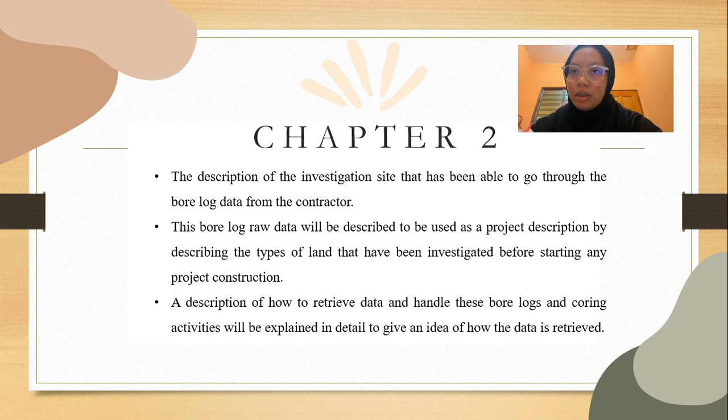For the introduction, in this chapter, we will emphasize the description of the investigation site that we have been able to go through from the borelog data from the contractor. This borelog raw data will be used as a project description by describing the types of land that have been investigated before starting any project construction. In addition, a description of how to retrieve data and handle this borelog and coring activity will be explained in detail to give an idea of how the data is retrieved.

Next, we go into the site investigation. The site investigation activity started with a desk study, which is among the most valuable and cost-effective aspects of the site investigation. At this stage, the site is not visually assessed. Instead, a search is conducted for any information regarding the site, such as the environment, constraints, land resources, and so on. Next is the site visit, where they will discover more about the site project.

After the 2 activities are carried out, it is possible to determine the aim of the investigation, which is to discover potential geotechnical issues that will occur on the site. The site investigation also aims to process the collection of information, appraisal of data, assessment and reporting of the geotechnical issues found in the site area. The main goal of the site investigation is to determine the sequence of different strata and the position of the groundwater and its fluctuation limit.

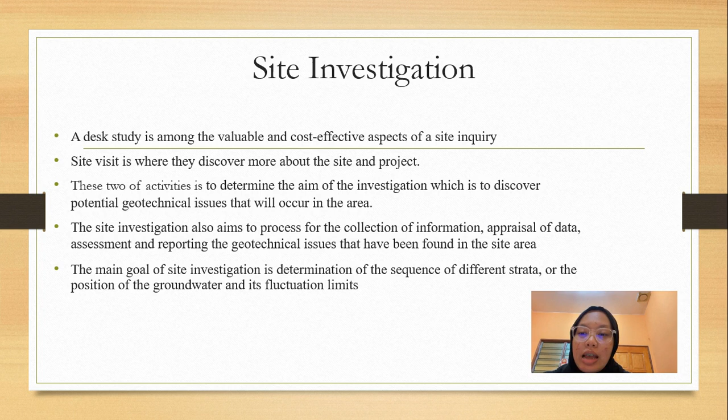The main purposes of soil exploration are to select among alternative sites, to decide on the depth of the foundation, to select an appropriate method of construction, to select and locate construction materials, to evaluate the safety of existing structures, and lastly, to decide on the remedial measures for damaged structures.

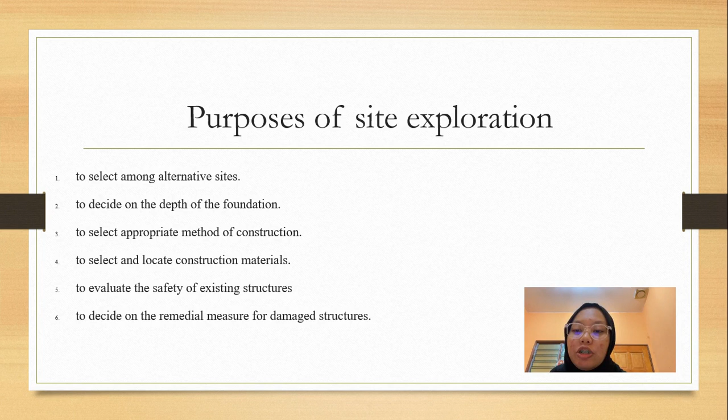These are a few field tests that we use: sounding test, static sounding penetration test, dynamic sounding test, Dutch cone penetration test, cone penetration test, and standard penetration test. In our project, we use the standard penetration test, SPT, which is an in situ penetrometer test.

These conventional penetration tests are performed in a borehole. The test will determine the resistance of the soil strata to penetration. To conduct the standard penetration test, the tools are a standard split spoon sampler, a drop hammer weighing 63.5 kilograms, guiding rods, drilling rigs, and driving heads.

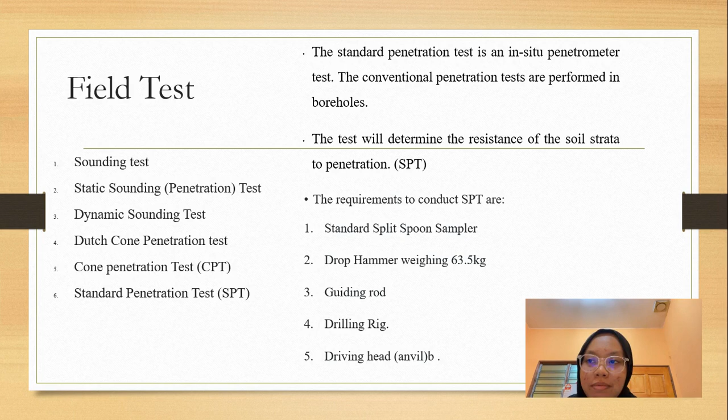Today I'm going to talk about the borelog data. There are two types of borelog data that you can get. The first one is the borelog data from the contractor, where we get the borelog data in situ sheet, shown in figure A, while figure B shows the borelog report with the data that you can get from the consultant. Both of these data will give you the significant values needed to design a foundation.

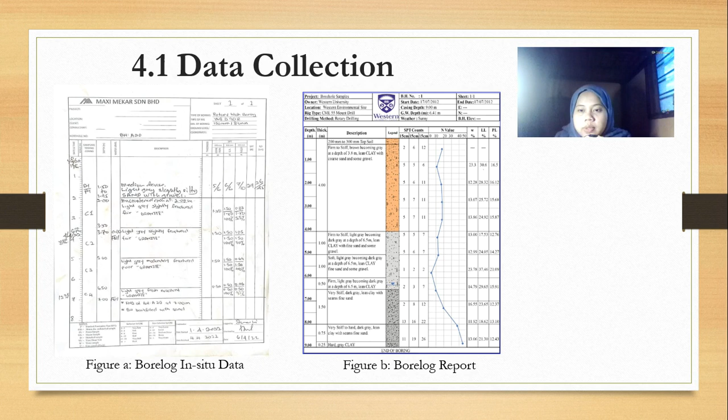It's required for us to do site investigation before we can design a foundation. One of the field tests that we can do is SPT, standard penetration test. When we do SPT, we get the SPT value. The N value should be corrected. The method is shown in the chart, showing how to correct the N value.

Before you can correct the N value, you need to classify which type of soil you have. For our case, the type of soil is sandy clay. We assume that it's a cohesionless type, hence we need to calculate the overburden pressure correction. We actually refer to a manual guide where all the formulas are given, and we just calculate what is needed.

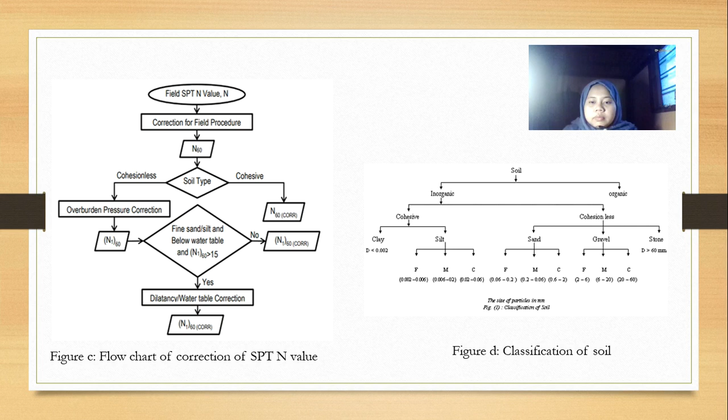The table shows all the parameters that you can use to design a foundation. All these parameters are calculated by the formulas given in the manual, or based on our pre-assumptions based on our studies.

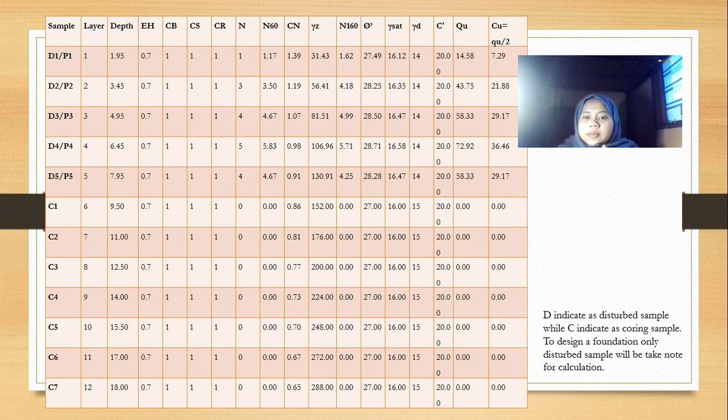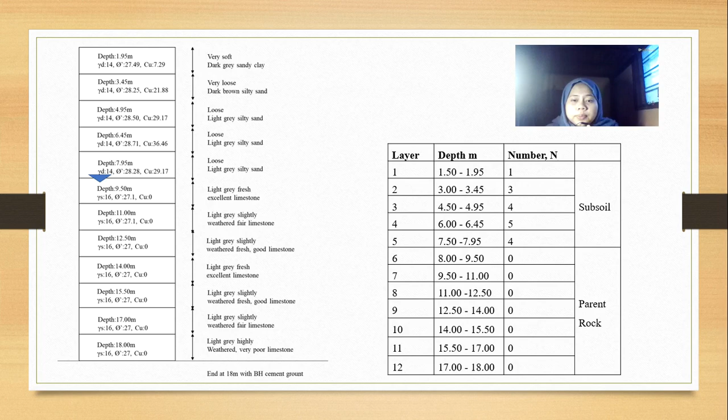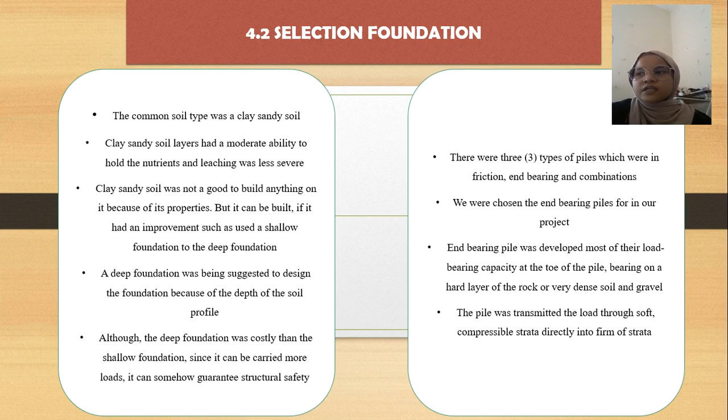Selection of foundation. The common soil type was a clay sandy soil. The clay sandy soil layer had a moderate ability to hold nutrients and leaching was less severe. Clay sandy soil was not good to build anything on because of its properties, but it can be built on if it had an improvement, such as changing from a shallow foundation to a deep foundation.

A deep foundation was suggested because of the depth of the soil profile. Although the deep foundation was costlier than the shallow foundation, since it can carry more loads, it can somehow guarantee structural safety. There were three types of piles: friction, end bearing, and combination of friction and end bearing. We chose end bearing piles for our project.

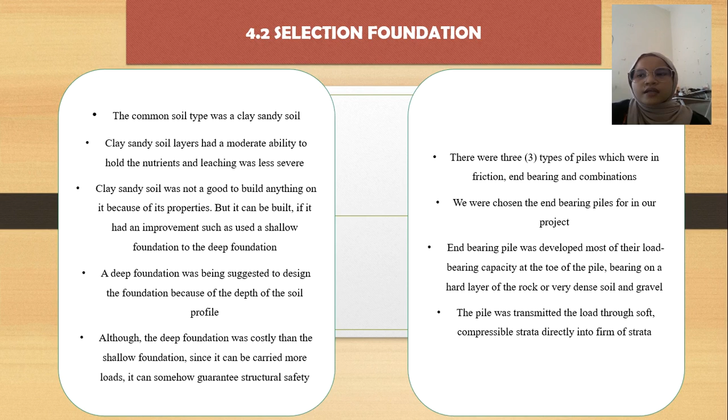End bearing piles develop most of their load bearing capacity at the toe of the piles, bearing on a hard layer of rock or very dense soils and gravels. The pile transmits the load through the soft, compressible strata directly into firm strata.

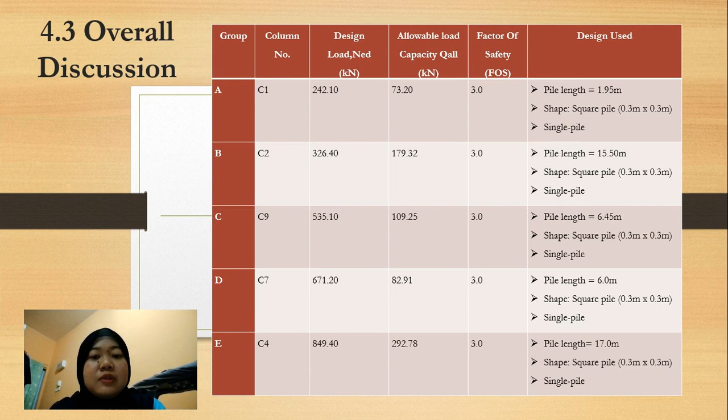Okay, the table, as we can see, shows that there are five groups of ranges of the column loads. From each range we will choose one to perform the calculation. For this table, all the calculations are using a single pile. Okay, next table. This is our calculation for the group pile. We chose C4 because it has the largest load from the column.

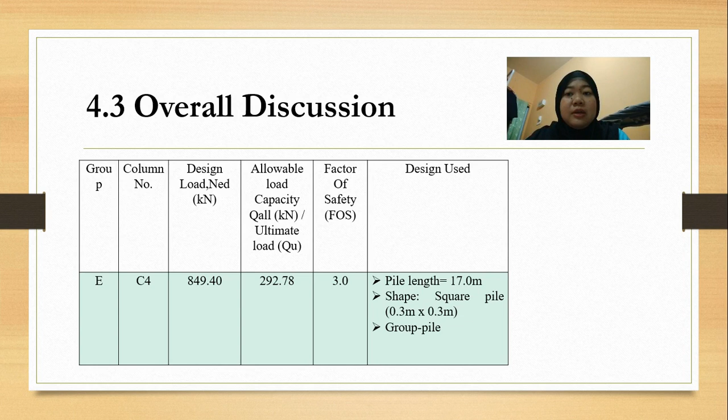For the discussion, we concluded that C1, C2, C7, C4, and also C9 show that the value of the allowable load capacity, Q all, is smaller than the value of the design column load, NED. That means the use of a single pile is not suitable for the foundation design, as the column had a bigger value than the foundation itself. So single pile design for this foundation is not strong enough to accommodate the load of the column and structure on it.

For the elastic settlement checking for all the design calculations, we concluded that the maximum value is below 65 millimeters. That means the settlement in the land area is safe and suitable for the structure construction. Thus the load from the column and the foundation can be borne by the soil structure.

From all the foundation designs, we came out with the calculation with the group pile. We applied it under column C4, which had the biggest design load of all the columns. We discovered that the value of Q all exceeds the design load of the column, which indicates that the pile is suitable under the column. Overall, we found that the group pile is more suitable to design a foundation for a semi-detached house construction project.

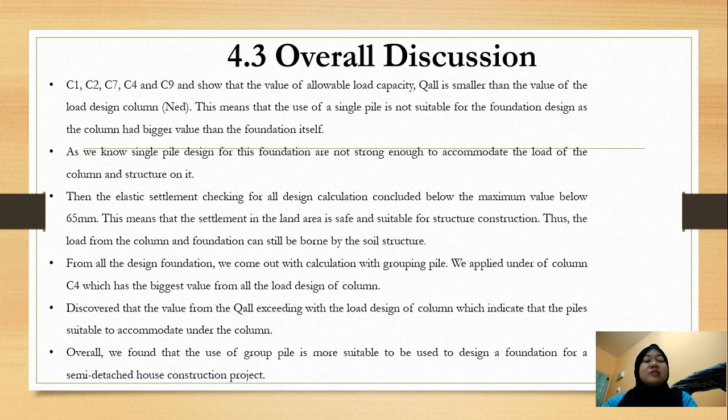Next, suggestions for this project. Based on the proposed foundation for the semi-detached house project on sandy to silty clay soil, some suggestions for future research on this type of soil will be given. In any foundation construction, the design of each feature must be emphasized to determine the safety and fitness of the foundation to be used. From the survey, the issues are the design geotechnical capacity of soil and rock to carry load transferred by piles.

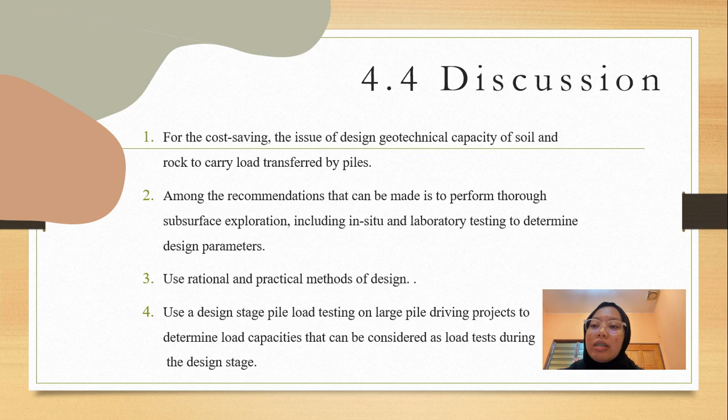Among the recommendations made is to perform thorough subsurface exploration, including in situ and laboratory testing, to determine design parameters. Next, a rational and practical method of design. During analysis, we need to perform wave equation analysis. The wave equation can be used to predict impact stresses in a pile during driving and to estimate the static soil resistance on a pile at the time of driving from driving records. If this method is used, the effect of significant parameters can be evaluated during the foundation design stage.

For the conclusion, most geotechnical engineers might advise a deep foundation over a shallow foundation for a variety of factors. There are different types of deep foundation, including pile foundation, basement foundation, cylinder foundation, and shaft foundation. Our group decided and agreed to have a pile foundation for this project. Our group has chosen the single pile for the calculation for our project.

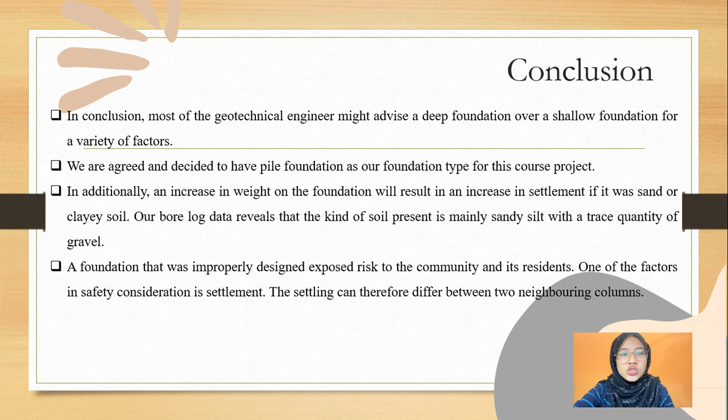The change in soil properties beneath the structure foundation is what mostly contributes to foundation settlement. In addition, an increase in weight of the foundation will result in an increase in settlement if it is sand or clay soil. Our bore log data revealed that the soil present is mainly sandy silt with a trace quantity of gravel. An improperly designed foundation exposes risk to the community and its residents. One of the factors in the safety consideration is settlement. The settling can therefore differ between two neighboring columns.